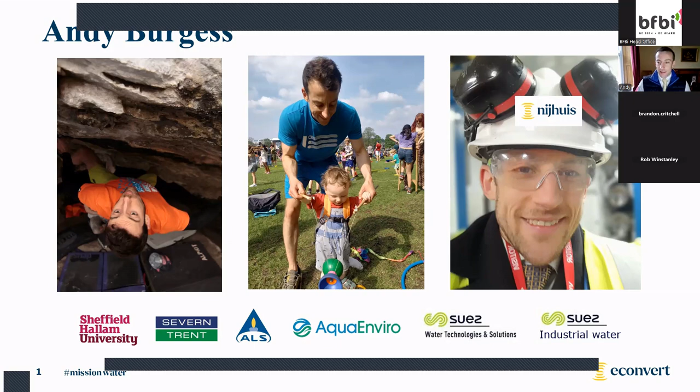In the market that we're currently in regard to the food, beverage, milk and industrial sectors, there's a big push, not only from a cost point of view, but also from a sustainability view in terms of how can we reduce carbon and recover energy on site. This presentation is going to be focusing on how we can recover energy from your wastewater.

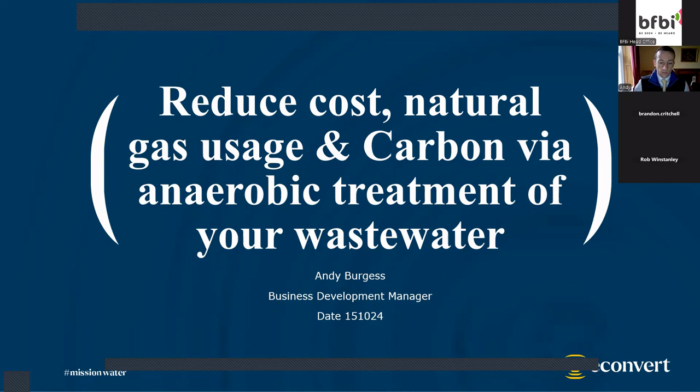So what we're going to talk about today, we're going to talk about a specific technology, anaerobic digestion specifically, and what are the benefits of this technology when it comes to recovering energy from your wastewater and reducing your carbon usage on site. We're going to give an example of the technology so you can understand what this looks like and what are the key process steps required.

We're also then going to go into a couple of examples which highlight the value in terms of typical scenarios which can provide a sufficient payback to justify the technology. We're also going to provide some information on our historical references as Nijhuis when it comes to anaerobic digestion. And then finally, the key steps that we need to go through when we're understanding how do we know if our site is suitable for anaerobic digestion when it comes to our wastewater.

So first off, what is anaerobic digestion? So on site at the moment, you will likely have a wastewater. And if we're using brewing as a typical example, we have bacteria that convert sugars to alcohol. When it comes to anaerobic digestion, we have specific bacteria that convert the inorganic and organic

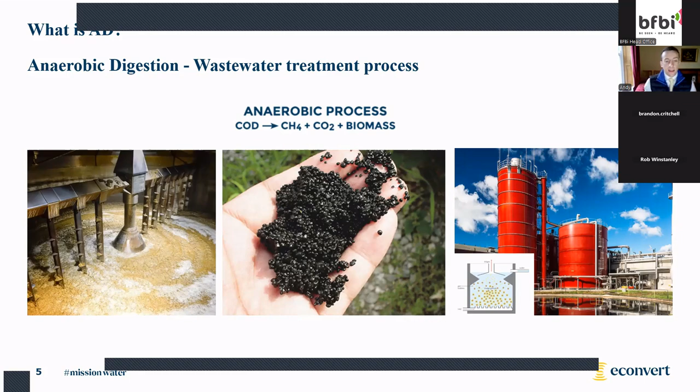So we've talked a little bit about what anaerobic digestion is, and how it can be employed on your site. But what are the key benefits that can be recovered from implementing this technology on your site? One is from a regulatory perspective. Whether you're discharging to river or sewer, you need to achieve a certain reduction of the pollutants. High rate anaerobic digestion is a fantastic way to reduce your COD concentration within your wastewater by up to 95%, without the need for aeration and costly biomass disposal in comparison with aerobic treatment.

It can also be used as a tool to support your net zero targets. Instead of discharging that COD to watercourse or using air for conventional aerobic treatment technologies, which has a carbon cost, because we're recovering that COD into methane, we're actually recovering that CO2 and using it as a sustainable fuel source. Just for an indication, about 6.5 tons of CO2 per ton of COD could be recovered. That's the CO2 equivalents.

So now I'd like to give you an example to see what the technology actually looks like, and go through an example of one of our standardized modular systems. Although we do bespoke larger assets, this can give you a good example of what an anaerobic digestion process looks like.

So this is an example of our standardized eco-reactor. And what you can see here is a containerized control module and flare stack. The flare is in place if the biogas cannot be utilized on site for a reason; it's basically a safety precaution that the biogas is burnt via a flare.

And what we have next to that control module is the reactor itself, that is held at around 25 to 37 degrees, depending on the specific design, and holds the biomass in suspension, and has the biogas collection within that as well. So hopefully that gives you a bit of an example of what the technology looks like. And this is sort of a prefabricated standard technology for our modular solution.

In terms of the operational time associated with this, it's typically 1 to 2 hours per day in terms of a visual planned preventative maintenance check. And this reactor size is typical for treating about 3.2 to 5 tons of COD per day. So that gives you an example of the loading rates achievable, but we do have more information on this on the following slide.

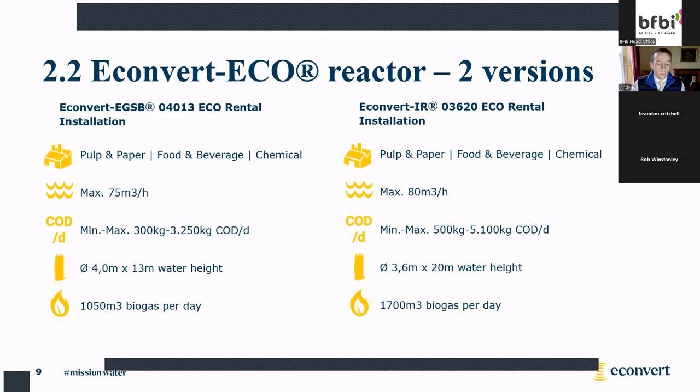So next, I'd like to go through a couple of case studies. We've highlighted what anaerobic digestion is, what the reactor looks like, and gone into a few details of the specifics around the design. But ultimately, when it comes down to implementing this on your site, recovering carbon but also recovering value from your wastewater, it's good to understand what the potential benefits are when it comes to appeasing the finance manager.

So I've done a couple of scenarios. The first one is based on utilizing the biogas on site to offset natural gas, as well as sewage discharge savings. So this is a site where we've got an on-site boiler that can potentially take methane in combination with natural gas, normally designed with a dual purpose burner. And we have a site that's currently paying to discharge their COD to sewer.

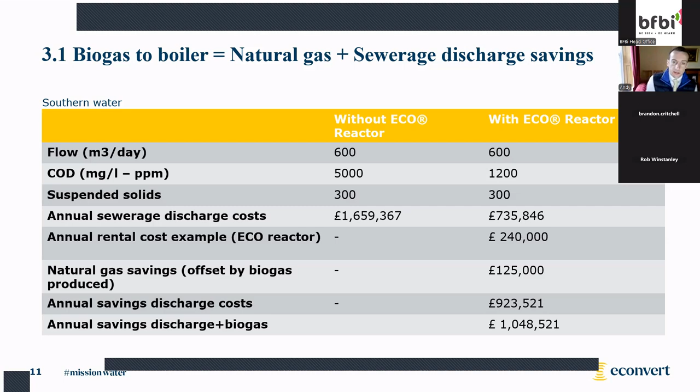And in this case, we've got potential to have around £125,000 worth of savings from offsetting your natural gas. So it's essentially replacing some of your natural gas usage with biogas. And for this application, it was around a £1 million saving per annum. So if you've got the right flow and the right load, it can be very attractive. So that's one example based on utilizing the biogas produced from your effluent to offset natural gas and save on your sewage discharge costs.

And then we have another scenario here, and this is based on a slightly lower flow rate and a different site scenario. So for this scenario, the customer was not discharging to sewer. They were discharging to watercourse with some existing aerobic treatment. So what I'm trying to demonstrate here is, what are the benefits of anaerobic digestion versus aerobic treatment?

And so, sorry, I lost track slightly there. So what are we talking about?

We're talking about the application. Oh, and also the application for this one is utilizing the biogas produced from your effluent to feed a combined heat and power system to generate electricity and heat. And the key thing when it comes to implementing a CHP on site is that you're not just producing electricity, you're also recovering the heat, which can be utilized on site.

So the savings for this example that we've got are allocated to recovering energy, reducing aeration costs and sludge by 90%. And because anaerobic digestion, the biomass produced from that system, is actually of value compared to aerobic sludge, which needs to be disposed of and treated at a high OPEX cost, we've got a number of key savings.

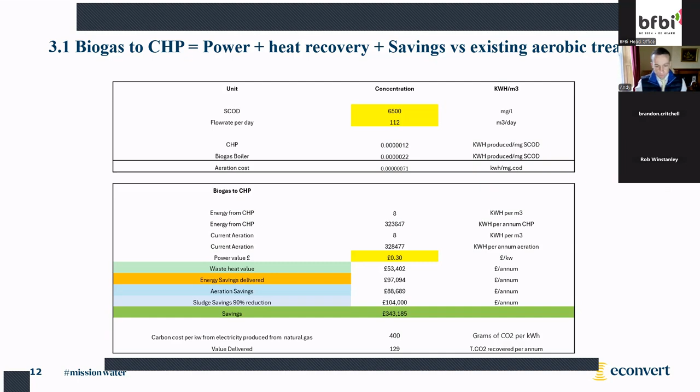But yeah, I suppose the thing is, anaerobic digestion is an established technology. So in terms of risk, those associated with implementation are really relatively low. And yeah, I'd be happy to take anyone to one of our sites to have a look in a bit more detail if they're interested.

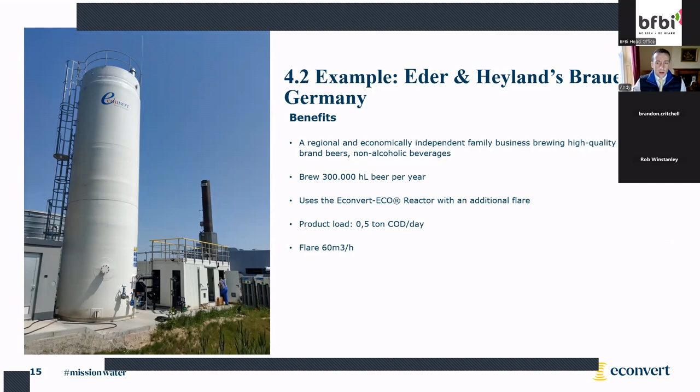And then just a quick comment on Nijhuis. We are a complete solution provider for water and wastewater treatment, because although it might have sounded like I was bad-mouthing aerobic treatment, it's not that it's not the right solution.

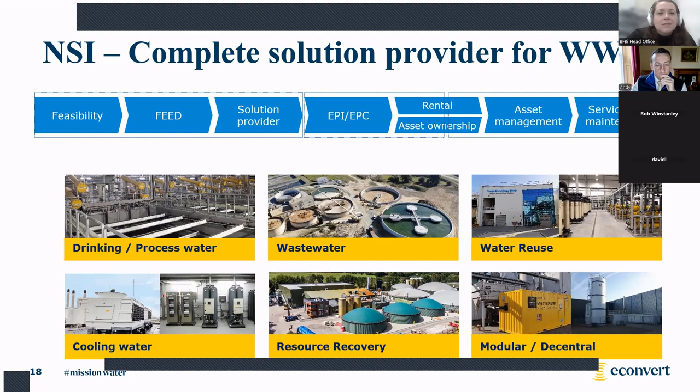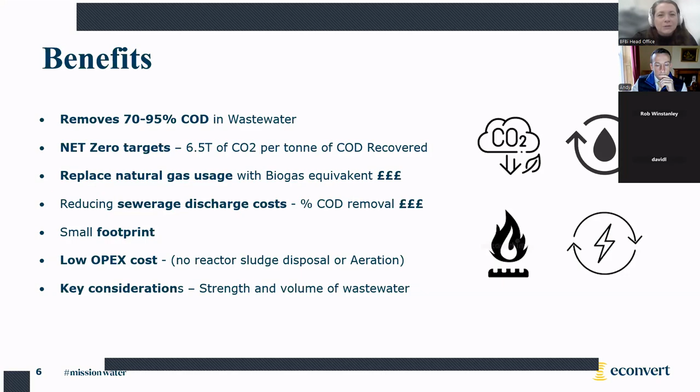You touched on earlier in your presentation about the footprint of the wastewater technology. But is it something that would be suitable for that urban/city environment, or is it something where you do need a little bit of space, even if it's smaller in comparison to other technology?

Yeah, so footprint is important. If you're in a heavily built up area, if you don't even have space for a 40-foot container, then it's not going to be suitable. But what I'm just showing on screen now, that's an example of the control system, flare and reactor for a small system. There would need to be a balance tank to balance your effluent as well, if not already in place. So footprint is definitely a key consideration when considering the technology.

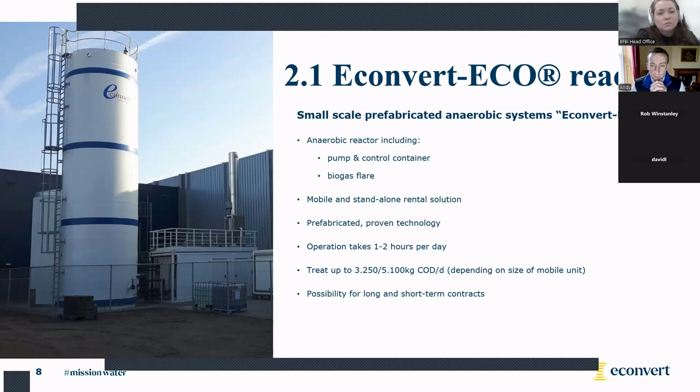And I suppose that leads on to my next question: is there a minimum size of beverage facility that can sustain this capital investment? Yeah, that's a really good question. It really is all down to the key elements that I mentioned when I talked about the feasibility assessment. Ideally to make a quick assessment, you need to be able to quantify the total COD load per day and the concentration. Once you have that information, then it's easy for me to do a quick assessment.

But as I say, the minimum COD load you need to consider the technology is, say, 500 kilos of COD per day in your wastewater, and a minimum concentration of 2,000 milligrams per litre COD. But the higher the concentration of COD, the better. And as I say, the COD load as a total mass per day needs to be above 500 kilos per day. Okay, perfect. Thank you.

Thanks, Jodie. No problem. I know you touched on both of those points, but I just wanted to have you reiterate the footprint and the minimum size of facility. But it looks like you will assess any facility to see what could be tailored for them. That's correct. Yeah, that's it.